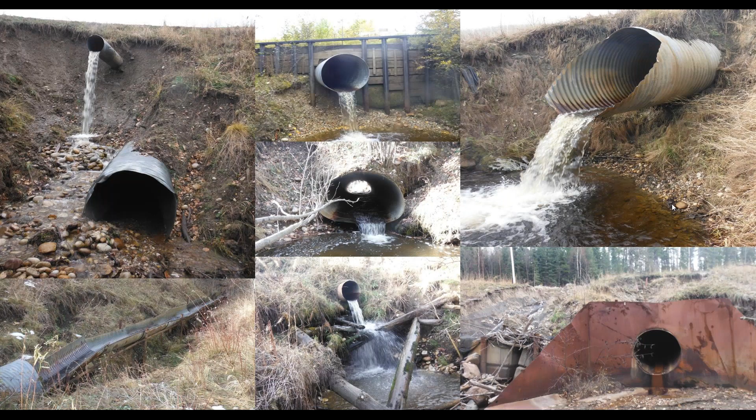There we go. Okay, so one thing I've noticed about the webinar presentations so far is that everyone seems to have their own personal collection of terrible watercourse crossings that they've seen out there in the landscape. So this is no surprise to anyone who is out there on the ground looking at these things. What it tells me, though, is that there's definitely a problem in our province with regards to this particular topic. Here are a few that I've stumbled across over my time, and I'm sure there'll be many more to come. But how do we get to this state? The question is, how do we get there? Why are we there? And why are we still fighting with this?

So let's take a step back a few years and let's think about the origins and the planning stage of road construction. What happens first? Well, to go from point A to point B, a road center line and alignment is characterized, found usually in an office on the desktop or through mapping software to begin with. And then it's followed up with field inspections and surveying.

Watercourse crossings are noted and found. And these watercourse crossings, the watercourses themselves specifically, are in a state of erosion. In fact, they have been eroding since the last glaciation, and they're continuously eroding, some at a higher rate than others, of course, as you can imagine.

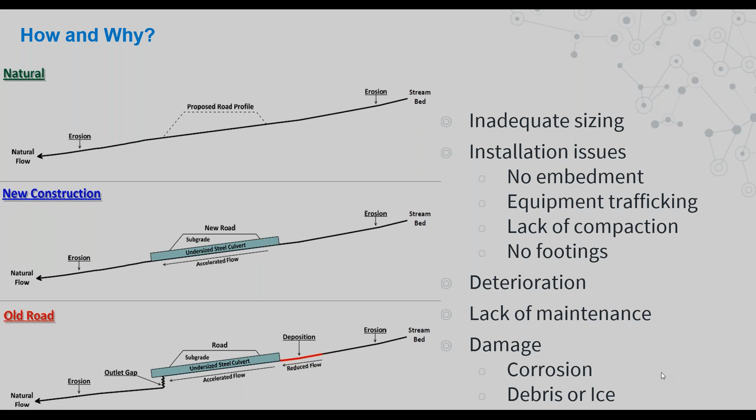So what are our options? What do we normally do to replace these? Well, the simplest option is to replace the culvert with a corrugated steel pipe. Let's hope we don't make the same mistakes that we did the first time when we built the road. However, these projects in themselves can be as simple as a 2 or 3 day job, or they can be several months in duration, depending on each site and site specific.

And again, I'm not going to dwell on the proper installation of a culvert too much here. There have been other webinars that have gone into this in more detail, and they've done a very good job. I'd encourage you to look them up when they're available. But basically, some advice from someone that I've worked with is to ensure that your slope is as close to zero as possible, and make sure you have it properly embedded and, of course, properly sized for the watercourse.

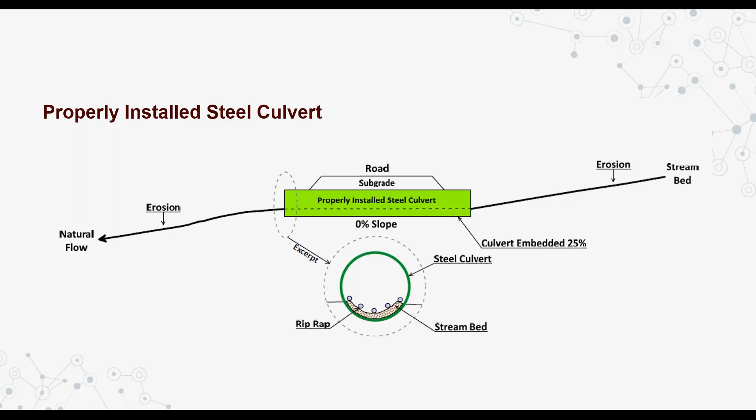What are the other options? Bridges. Definitely install a bridge. Again, there are other concerns with costs and site-specific constraints that may apply, but it is another tool in our toolbox.

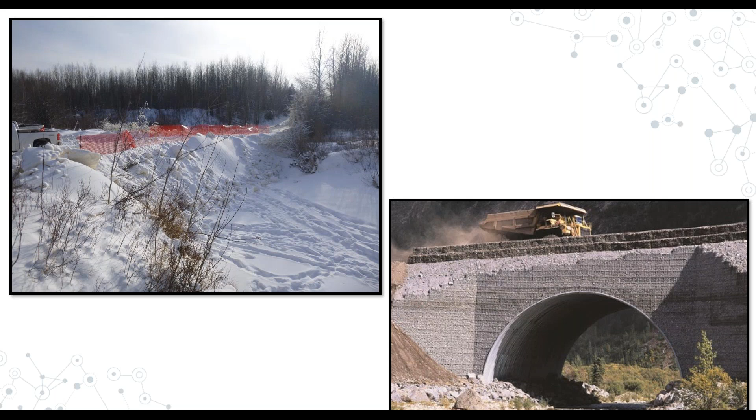We also have temporary structures like log or snow fills or ice fills that may be applied, again, only during temporary access requirements. And we also have multi-plate arches, which here on the right, you can see in a mining setting in Alberta, which can be applied, again, another option in the toolbox, but there might be constraints.

Well, if we take that same arch design and let's reduce it to something a little bit smaller here, maybe with a different material and lower cost and ease of installation, we actually have another tool in our toolbox that we can apply on these resource roads. And here are two pictures of this modular open bottom culvert system we're going to talk about.

The product is Enviro-Span. It's built out of high density thermoplastic material. It's designed to be flexible. They call it an open bottom modular culvert system.

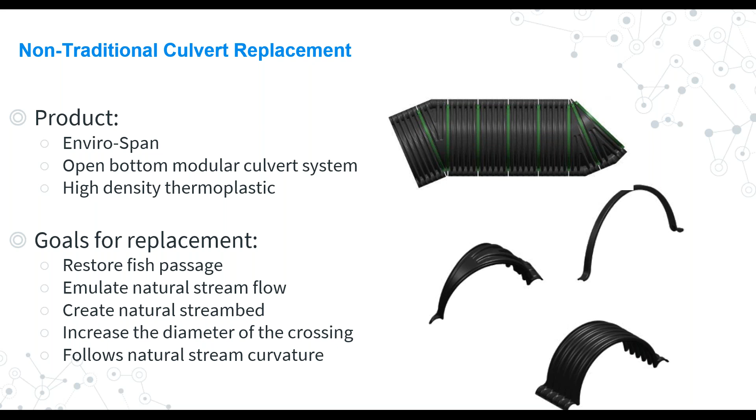A properly installed Enviro-Span arch is able to accommodate the natural horizontal gradient of the watercourse. Basically, you can install this product on any angle of watercourse as long as the subgrade is able to. The Enviro-Span arch will stay there and in place. So basically equivalent to the angle of repose, so to speak.

The bottom or underside of the arch allows you to emulate the natural stream bed if you need to recreate it, if you're removing a corrugated steel pipe, for example. And we'll go through each of these items, including the footings and the placement of this product. But this proper installation will allow the natural rate of erosion for that watercourse crossing and allow the natural passage of fish migration through the structure.

A quick comparison between the two products. I'm only going to compare it to a CSP because of the size of the product. The largest size of this product is about 2,100 mils. So it's most comparable to a culvert of similar size. And for simplicity, that's the most direct application of this tool.

The weight is very lightweight. You can move these sections and place them by hand with two people versus slinging in some large diameter corrugated steel pipe. The cost of installation is actually less than a properly installed CSP, and I attribute that to the reduced requirement for the compaction equipment required for the proper installation of that. The compaction around the Enviro-Span, as you'll soon see, is quite minimal.

It's resistant to corrosion, versus CSP will deteriorate. Leaching is non-existent. The strength is comparable. The integrity is very good. It's resistant to cracking and breaking. The only downfall of this particular product is with regards to UV radiation. If it's exposed to sun, it can deteriorate. But given that it's installed underneath the road, that's a pretty minor problem.

It's resistant to abrasion, and as I mentioned, the slope is basically unlimited. Whereas with a CSP, you know, if you're anything higher than 3.5% gradient, you're getting into some very interesting fish baffles and that sort of thing. So that's no longer required.

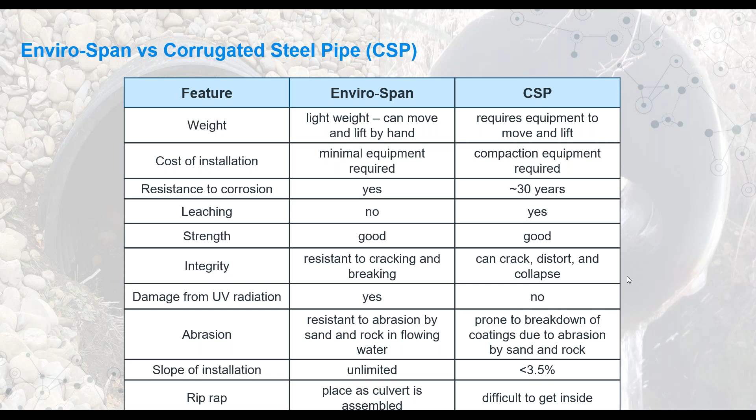So let's hone in on our case study here. Let's go to Walton Creek. This is a project I completed a few years ago. It's located 21 kilometers west of Sundre, Alberta. The watercourse is a tributary to Bearberry Creek. It's a small permanent fluvial water body with an average bankful width of 2.4 meters.

Having said that, for this project, we're not into rebuilding roads. Rather, we're just going to replace the watercourse crossing. But if you did have a project where you were in the planning stages, do keep that in mind with your watercourse crossings.

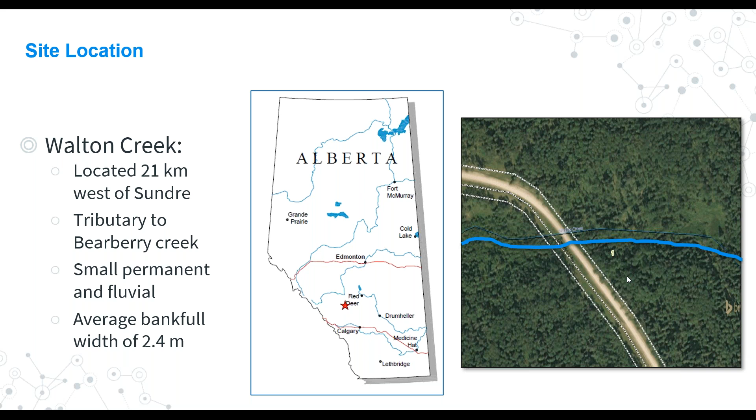Some of the existing culvert characteristics include the inlet end, where some ripping and cutting of the structure was observed, so some exterior damage. There was some minor erosion present, again, likely as a result of that damage to the inlet end. The outlet end, there was a significant amount of road subgrade that had washed away, creating a cliff-like situation, so to speak. The outlet end of the culvert was elevated or perched by better than half a meter. The scour pool was approximately 1.18 meters in depth, so a fairly significant pool.

Overall, the culvert was a 1,000 mil culvert with 17 meters in length. It was partially collapsed, most likely due to poor installation practices and trafficking of equipment over top of that structure. We figure kind of had the banana effect going on. The culvert was not at all embedded. There was no substrate inside, and the horizontal gradient for this culvert was more than 7%, causing increased water velocity.

Here's kind of the sketch of what the existing facility looked like. We have that culvert at a significant angle. We have some fairly steep slopes kind of on the shoulders of our road, in particular on the outlet end, which were eroded. The biggest take-home message from this slide that I always like to point out is on the far left side, you can see that red kind of dotted and hashed line. That's a PLA, so a pipeline.

It's fairly standard under the Public Lands Act to have your dispositions adjacent to each other, and that does in fact make plenty of sense from an ecological and fragmentation perspective. But it does incur some challenges for watercourse crossing replacement projects and restoration. As you can imagine, some of these crossings were trenched in, so before horizontal directional drilling was a common practice, which means that this pipe is likely not that deep.

So if you require the removal of fill over top of a pipeline, in particular if it's active or operating, that's generally frowned upon. So that's something to keep in mind with these projects for sure, is who's beside you, who's your neighbor, and what other obstacles you might have to overcome to complete your work safely.

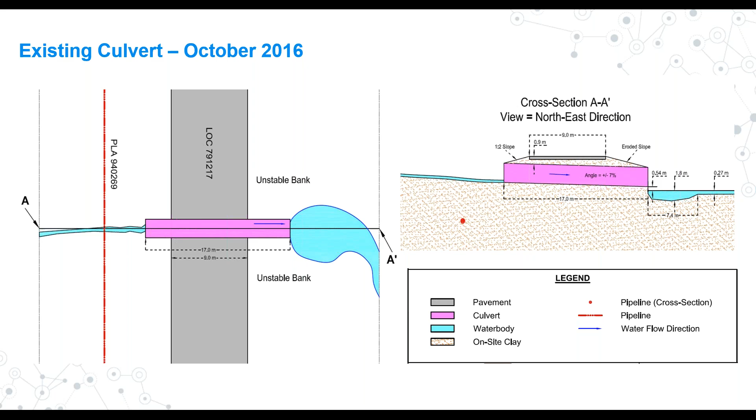This is that inlet end. You can kind of see it's bent up and cut off. It looked like somebody had taken the oxyacetylene torch and chopped off the end. Our guess is it was maybe as a result of trenching activities for that pipeline that was installed on this side. We don't really know that, of course, but that's kind of our only theory with that.

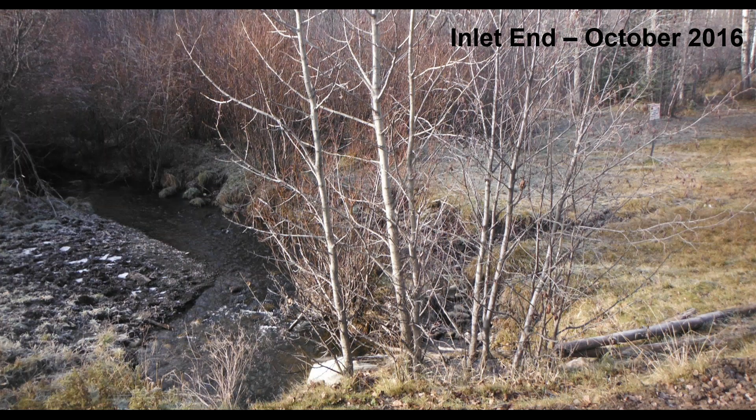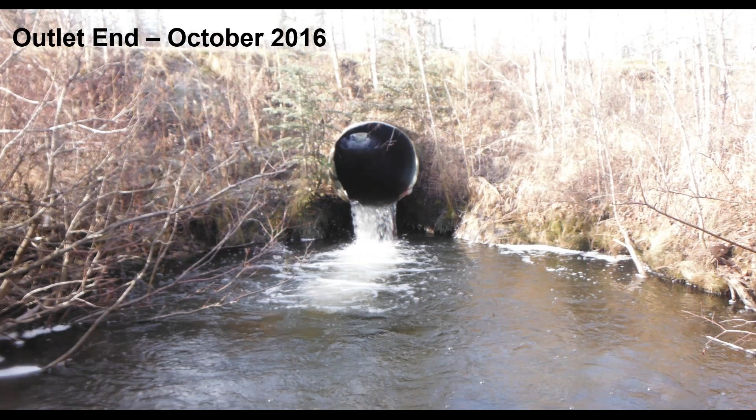Here's a view kind of from the top looking down at the inlet end. You kind of see a bit of a dog leg in that watercourse. The alignment isn't exactly where it should be, but it is what we have to work with. Here's that outlet end showing the hanging culvert by approximately half a meter and that very large scour pool, creating a fabulous place to go for a swim on a hot day.

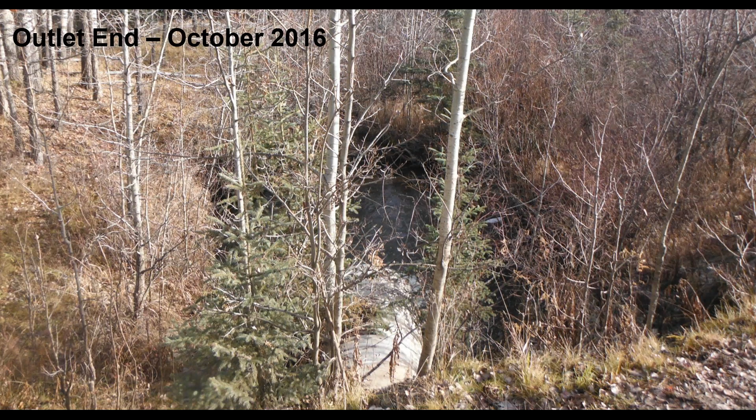Here's the shot from above looking at that outlet end, and what you see in particular on the right, the road subgrade has eroded to a point where it's encroaching onto the road running surface. As you can imagine, that creates a fairly significant safety concern. So it was definitely time for this one to have some work completed on it.

Some of the fish species that were brought up by the AEP Fish and Wildlife Internet Mapping Tool included brook stickleback, lake chub, longnose dace, white sucker, and a stocked inventory of brown trout. The RAP, or the restricted activity period, for this watercourse is September 1st to April 30th. And as you may or may not know, the RAP is the designated times of the year where in-stream work should be avoided to prevent impacts to fish during sensitive life stages, such as migration, spawning, egg incubation, and fry emergence. So avoid the RAP whenever possible.

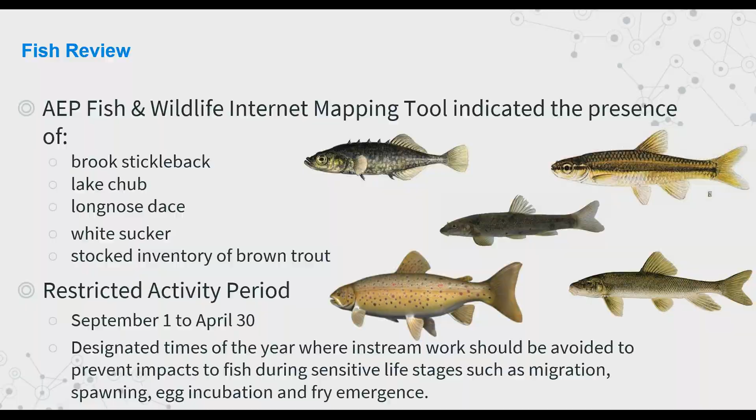The proposed culvert replacement included maintaining the stream flow, facilitating the natural stream alignment, so if any slight corrections could be made with this work, do our best to accommodate that, minimize the amount of in-stream work, and of course, minimize the amount of turbidity, and minimize the road closure of this particular disposition, which is always an interesting one.

The majority of this work was completed on the weekend. All road users were notified, and plenty of signage did go out at the beginning of this road. But one thing I noticed was that when you close the road on the weekend on the east slopes, the larger the fifth wheel, the larger the negative vocabulary.

Having said that, we did complete the project and were able to let the campers through as quickly as possible. We also wanted to increase the diameter of the replacement culvert to accommodate the flow as indicated by some of our modeling associated with this watercourse. We wanted to remove that steel CSP and not leave it in the road bed. We wanted to complete our work outside of the RAP.

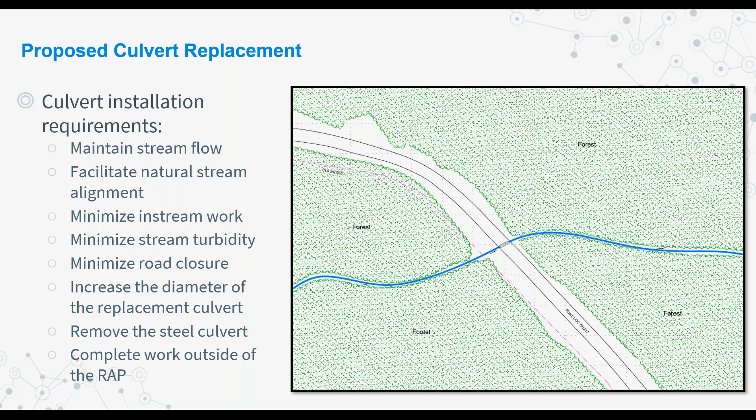Here's a sketch of our proposed culvert replacement utilizing our Enviro-Span modular culvert. Again, we're set back from that pipeline and we're not removing any material from it at this point in time. And the road alignment on that slightly longer Enviro-Span crossing is shown here. We'll also improve the erosion on the outlet end by changing the slope of that, by extending it just a little bit more and revegetating it as required.

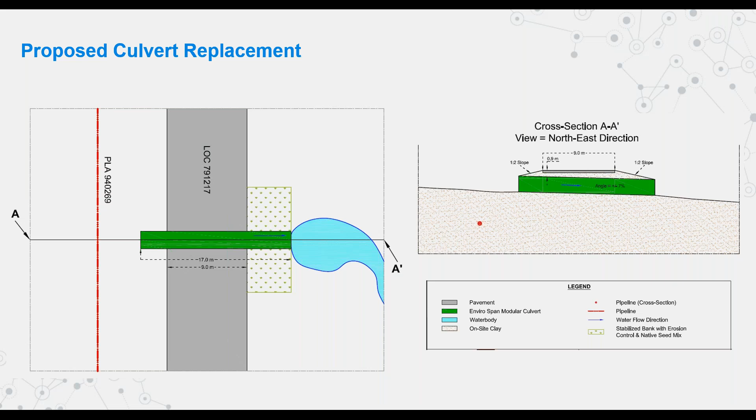The first step is to remove and excavate the soil for this road. For this project, we reallocated approximately 1,200 cubes of mineral and aggregate, and this was stockpiled on both sides of the watercourse crossing. For water management, our work area was to be isolated from the watercourse with steel plate dams.

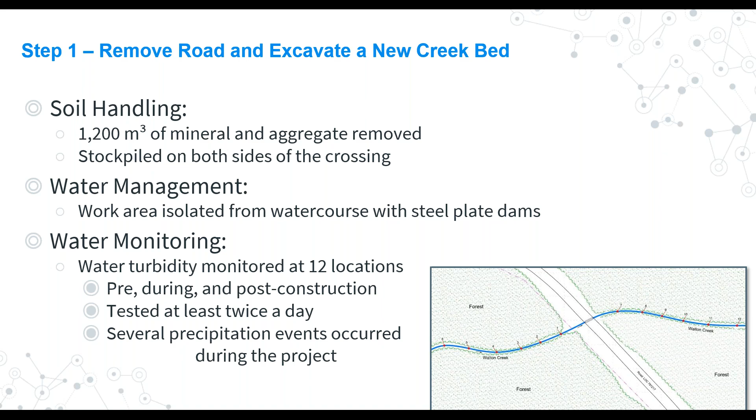Turbidity monitoring was completed at 12 locations, and this was done before, during, and after construction. This was tested at least twice a day, and several precipitation events occurred for the length of this project. Again, highlighting the importance of your background monitoring stations, just so you have equivalent turbidity readings to compare to. Here we are excavating the road subgrade material, piling it on the one side. That's the 1,200 cubes I referred to earlier.

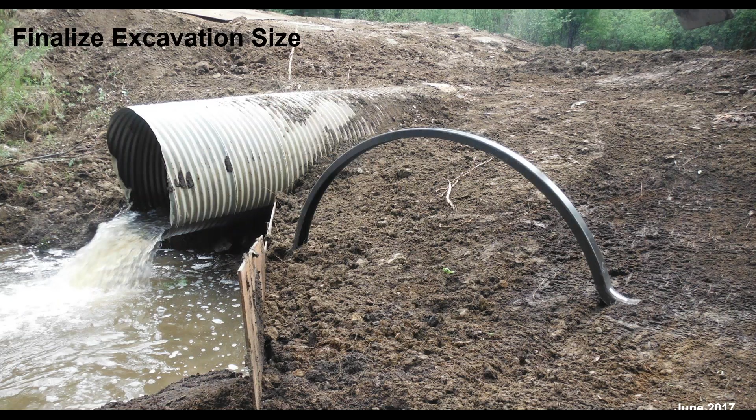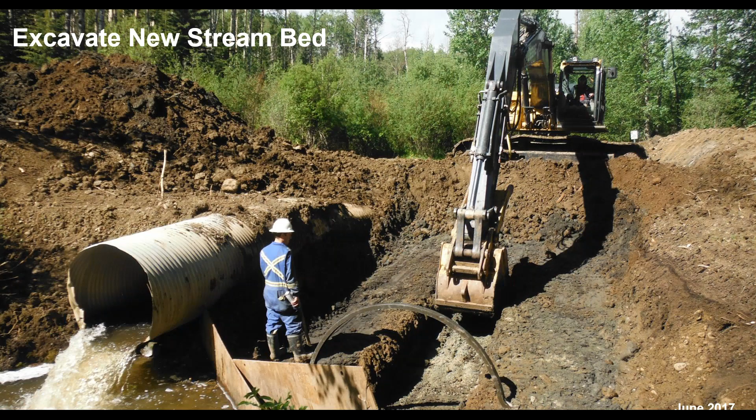Next, we're installing the steel plate cofferdams. This is on the inlet end. This is in preparation to put our workspace into isolation from the watercourse. Here we are sizing up the alignment of our new crossing in relation to the old one, and getting a feeling for where the soon to be constructed stream bed will set up. And here we are excavating more material to create that stream bed. We decided to use the digging bucket here for this size of arch, just because the cleanup bucket was too large.

And step number 2 is the footings. The best footings for this structure, as recommended by the manufacturer, are flexible and allow for movement. As I previously mentioned, this plastic is designed to bend and to be flexible. It's designed for this type of environment where you have a lot of freeze and thaw cycles and frost heaving, as you would adjacent to a watercourse. This is really what this product's meant for. So when it comes to footings, flexible is really the recommendation.

It could be something as simple as locally sourced logs from the adjacent timber stand. In our example, we use pressure treated poles. There are other options out there, including concrete grade beams, precast half cylinder grade beams, or concrete filled steel pipe. Those have all been used, but as I mentioned, the manufacturer really prefers something more flexible to allow the structure to move underneath.

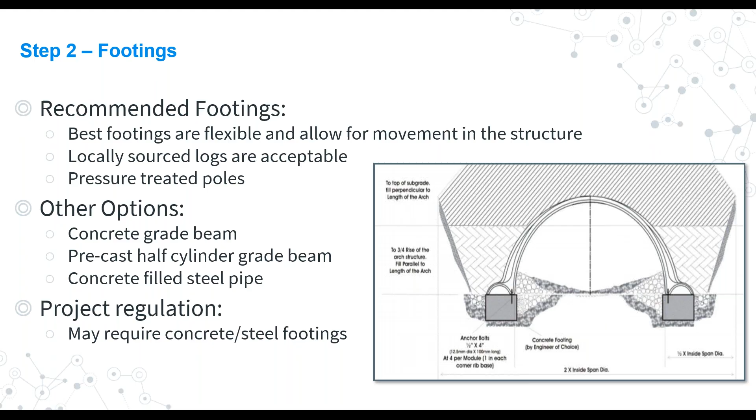So here we are laying out the footings. We have pressure treated poles on the bottom, and we're continuing to excavate our stream bed. I won't go into depth on stream bed creation and emulation in this talk, simply because there's another talk about emulating stream beds coming up. So I'll leave that good material for that talk. But that's essentially what you're doing here, recreating that stream bed.

Often when we're doing these, we find the original stream bed adjacent to this watercourse crossing, and we can tell that based on the sediments and the organics and the aggregate profile of the soil as we excavate. So in most situations we're able to place this right on or very near to the original stream bed for the watercourse crossing.

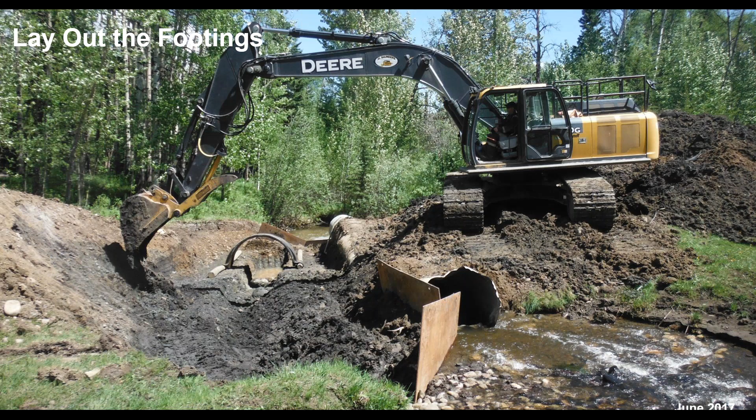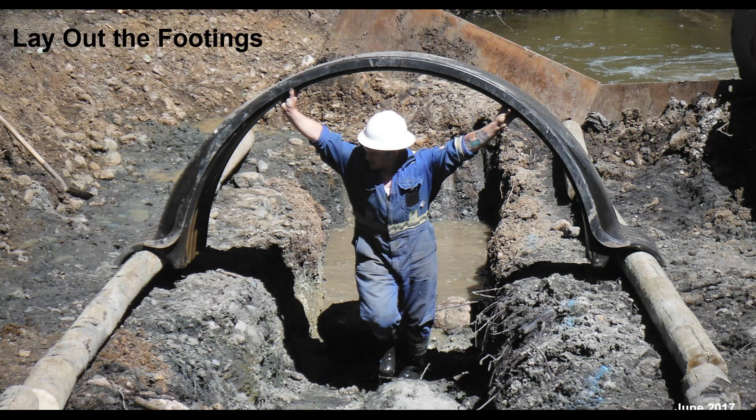Here we are continuing the excavation, laying out our newly created banks for the footings, and we'll work up towards the inlet end of this particular structure. Here we are sizing the placement of the footings in our newly created stream bed. Like I say, these pieces are very maneuverable, and you can slide them up and down the footings without too much difficulty. Here we are with our footings laid out.

Now, the modular culvert assembly: these structures are modulars that are 2,150 mils across. So the opening is 2,100 mils, and the width of these is better than 1,000 mils. The weight of each of these is approximately 64 kilograms, and our designed length was 18.2 meters. Therefore, we required 17 modules placed to get our watercourse crossing length.

The placement of these is fairly straightforward. You can sling them into the excavation using an excavator or another type of machinery, and then you can move them by hand. It's fairly straightforward, as you saw in a previous slide. And then there's slide connections that sit on top of the flanges to hold the modules together. Basically cover the entire structure with a geotextile and install the riprap where required.

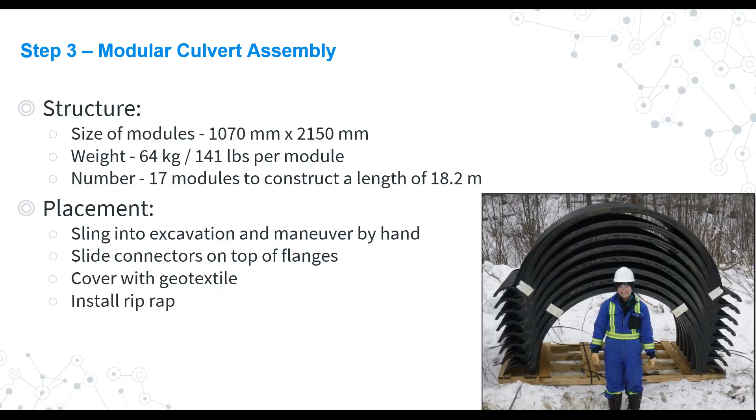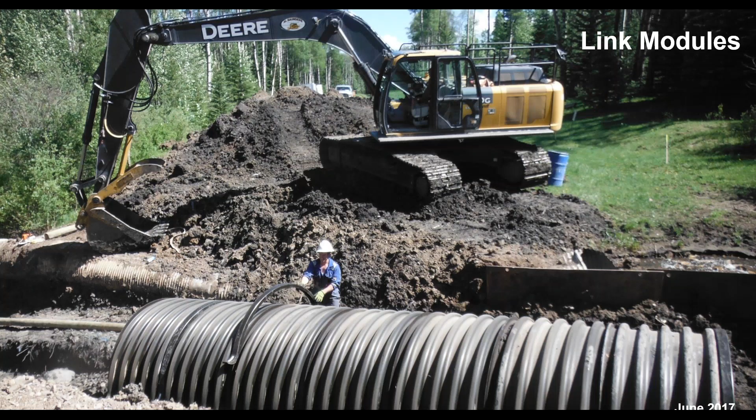Here we are placing the modules on top of the footings. We slung in a package and basically pop them apart, start laying them down. Here's a slinging in package of the modules. And here are the collars or the link modules that connect the different modules together. And they just sit on top. There's no hardware or nuts and bolts to strap together. They simply just sit on top, and the mass and the weight of your subgrade is really what holds everything together.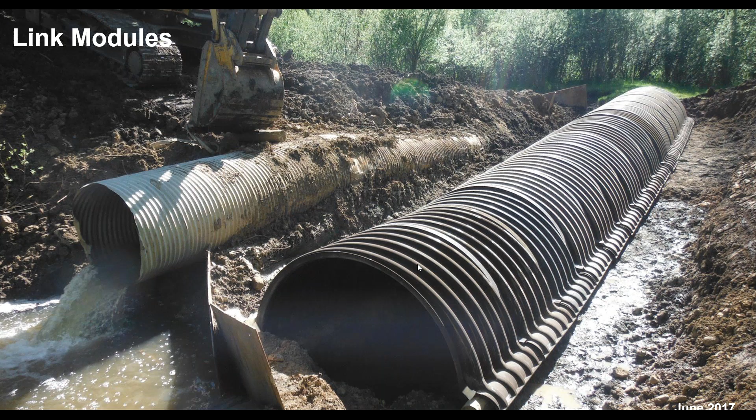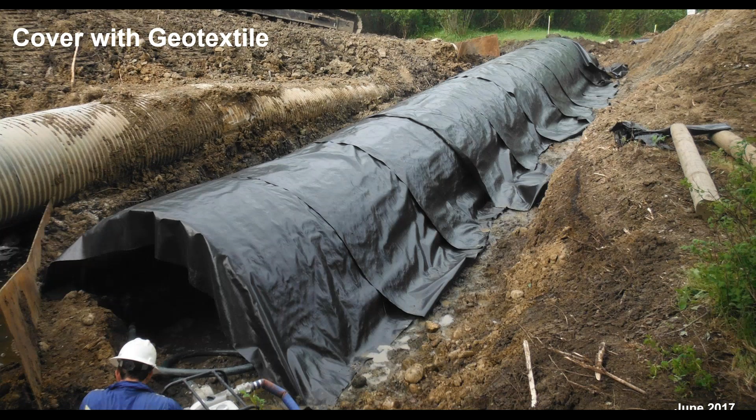Again, some more linking with the full structure totally linked together here. Our 18.2 meters, everything is ready to go. Here's another shot of it in relation to the road subgrade and subgrade material on this particular watercourse crossing. Here we are covering the structure with geotextile. There's no recommendation whether you use a woven or non-woven geotextile. They just recommend covering it.

Step 4 is the backfilling and the purge. Backfill is recommended with simply hoe tamping the soil. For this example, we did utilize the portable hand tamper. However, it wasn't really required, as we found later on. And as the manufacturer stated, there's no requirement to reach proctor density with your subgrade or even 90% proctor. It's just not a requirement. Too much compaction with this structure could result in collapse of the structure from the outside inward. So that's why they recommend simply just a hoe tamp.

We backfill this structure in 15 centimeter lifts on either side, being fairly diligent to fill up either side sequentially. If you place too much soil on one side than the other, you actually end up moving or pushing the structure out of alignment, which would be less than ideal. You want to make sure you have greater than 1 meter fill over top of this structure before you reach your road running surface.

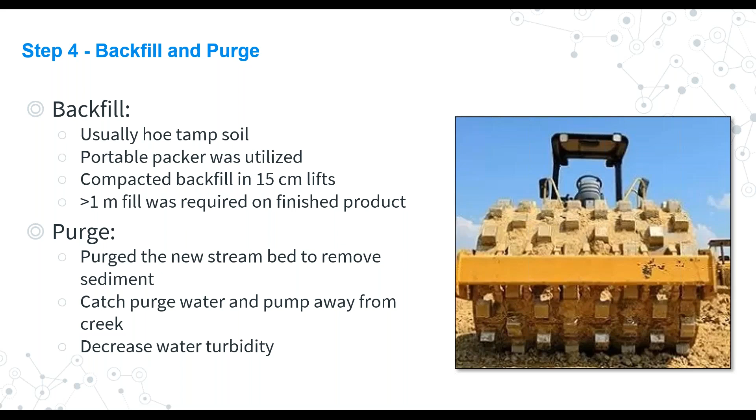Purge, this is referring to the watercourse. So now that we've created a new stream bed, we want to make sure that we don't have any sediments or any source points for sediment release into our watercourse. So we actually purge our stream bed and remove the water appropriately away from the creek, just to decrease your water turbidity even further so you don't have any exceedances.

Here we are with the backfilling. You want to use a material that is suitable to backfill. So what that means is basically nothing that's sticky, wet, and sloppy. You want to use ideally a good structural material that is nearby. If you are excavating one of these and you end up into some of that liquid soil, you definitely don't want to be backfilling with that, because there's no structural integrity there whatsoever. So you want to find the good stuff and place that adjacent to the structure and backfill sequentially either side in approximately 15 centimeter lifts back and forth.

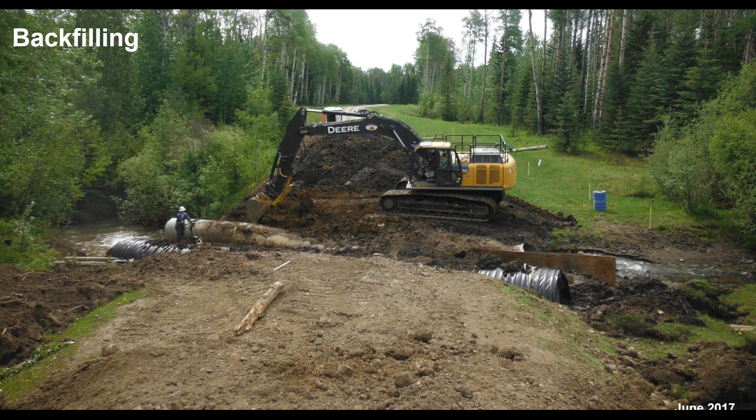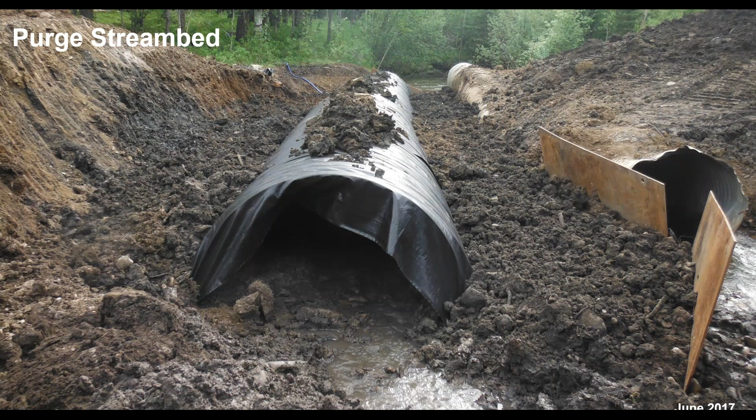Here we are commencing the purging of the newly created stream bed. Again, removal of any fine sediments that might be in there and removing those away from the watercourse, so that we don't have any unwanted increases in turbidity. So removing that dirty water and disposing it into the forest while maintaining our watercourse flow.

Here is the inlet end of the culvert. Once we were satisfied with our turbidity readings from the newly created stream bed, we were able to flip our watercourse over to the new structure, thereby discontinuing the old structure. As you can see here, our watercourse is now entirely flipped over to the modular open bottom culvert.

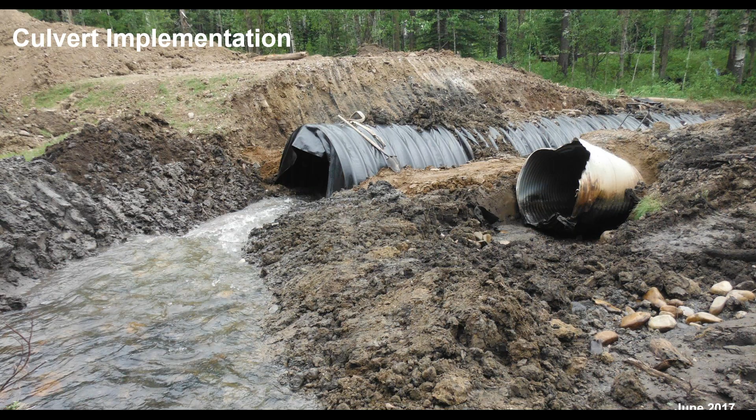Step 5 is the removal of the structure. Now, when removing these things, safety is definitely paramount. If possible, separate these sections in smaller pieces for easier removal. Even though it may look like there's no debris or sediment inside, there's always a likely chance that they are stuck in the riffles and whatnot. So when you remove these structures, you want to make sure that you're not picking it up and dumping that junk into the creek. You want to be pulling it out in sections and pulling it back towards you.

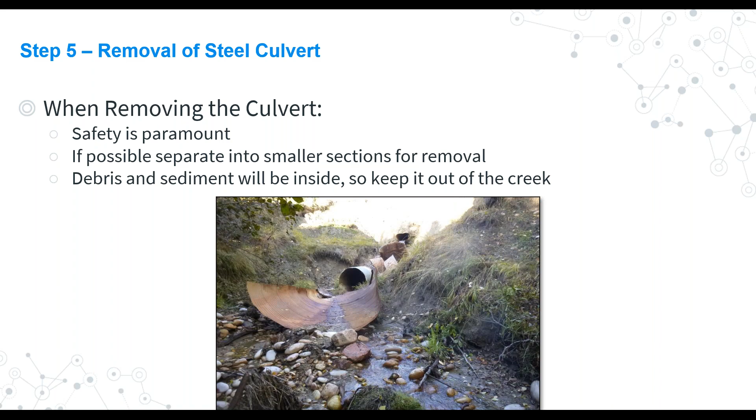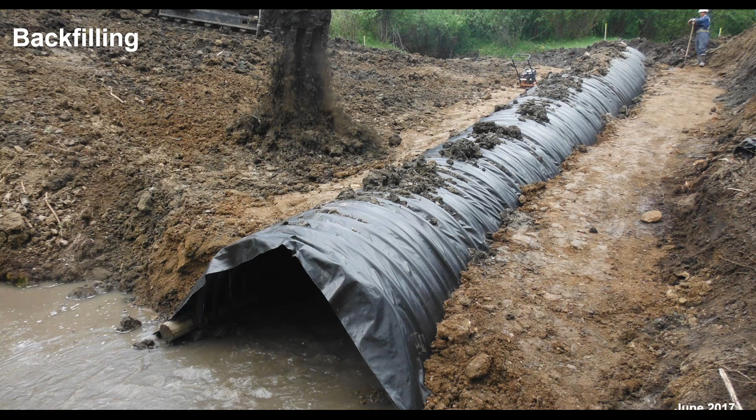Here we are doing that. We've separated the original structure and are pulling it out sequentially away from our watercourse and crushing the material for disposal and recycling. Our backfilling activities continue, reaching further to the surface of the structure in sequential increments. More backfilling, as you can imagine, takes a while to backfill 1,200 cubes appropriately.

Step 6 is the reclamation. Some of these details include maintaining that 2-to-1 slope on the road structures to accommodate revegetation, and placement of topsoil. If you have any, you want to make sure that you distribute it properly and to your best advantage. Seed the disturbed soils with a native seed mixture. Aprons on both ends were completed with Class 1M riprap, and complete your final water monitoring activities throughout the project.

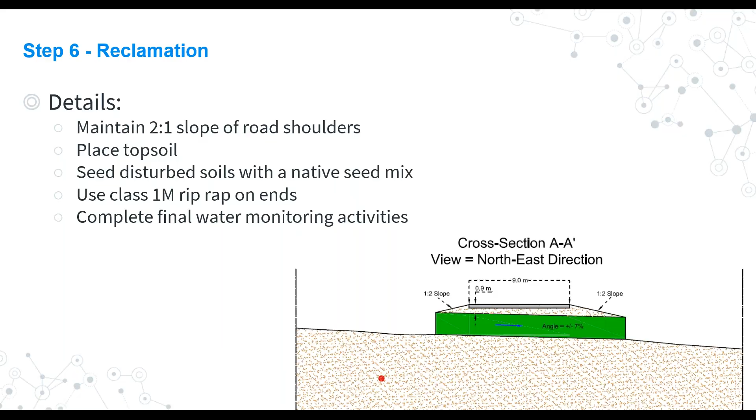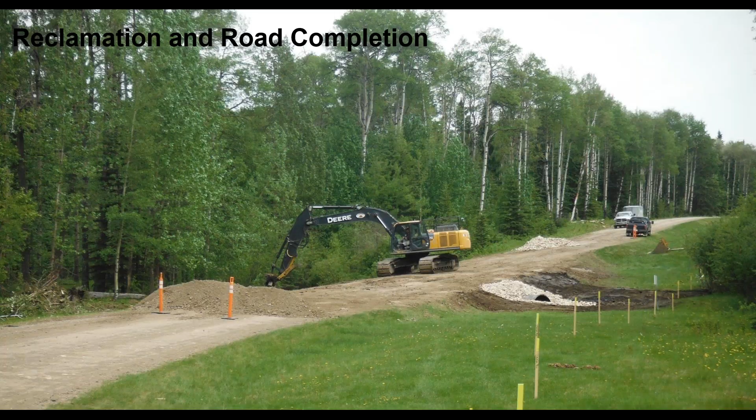Here we are kind of putting that soil back together, finishing our 2-to-1 grades, installing our Class 1M riprap apron on the outlet end. Here's our apron on the inlet end, running right up to that road surface. And the final cleanup activities, you can see here some of the aggregate material that we salvaged from the original operation is still readily available to bring across, and we always try to bring in a load or two of new aggregate to finish the job off.

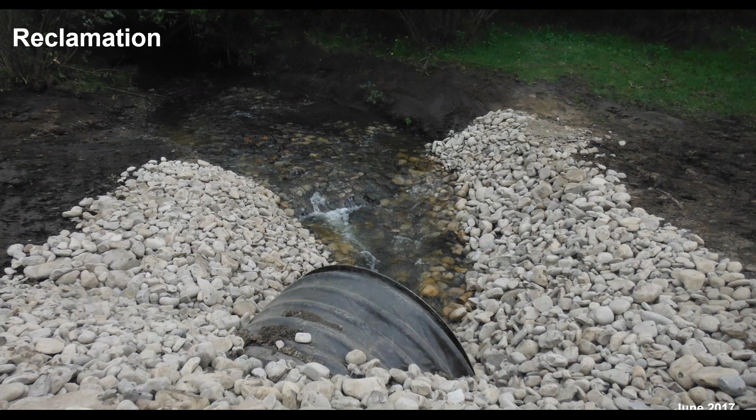Here's our inlet end looking down. So if you remember the previous photos, the inlet end had a bit of a dog leg. We kind of tapered that out a little bit here with this new installation, just simply by realigning the new facility and the new structure. Here's a shot of the inlet.

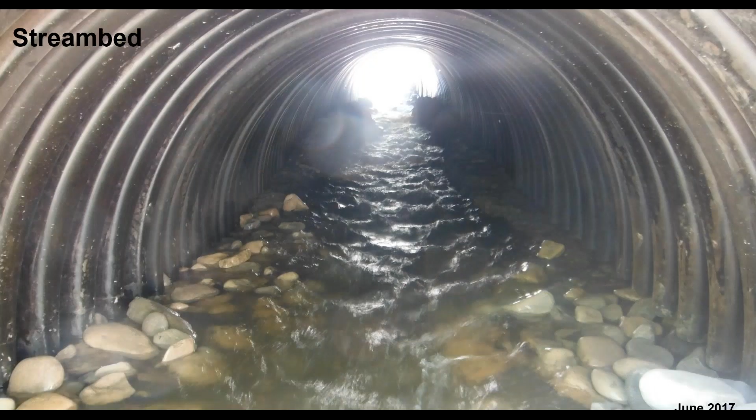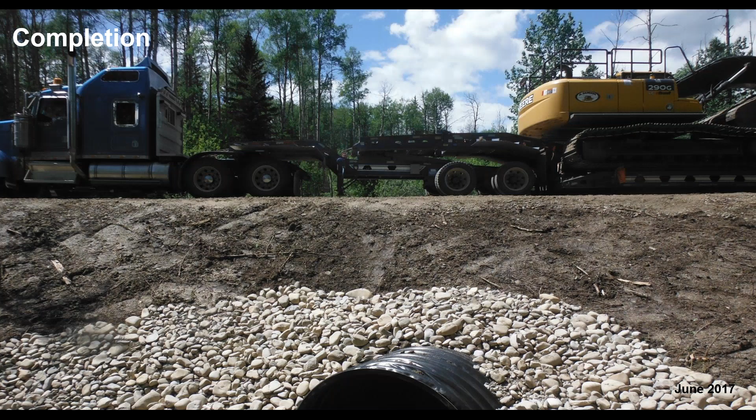This is the outlet end looking up. This is the stream bed kind of finished with the water flowing together. You can see our riprap on either side of our new stream bed and banks. And here's a shot of the end, moving out the equipment at the end of the day after everything is seeded. Follow-up visits, field inspections are recommended annually.

Traditionally, we use the GOA inspection forms. Now we have an app that's available, a GOA app. We'll probably be looking into its use to see if it's appropriate to accommodate these newly restored crossings this year. But traditionally, we do use the GOA form.

Other crossing details include maintaining the road running surface condition, monitoring the abutment condition, monitoring the vegetation recovery, and keeping an eye on your bank full width, both up and downstream at every inspection, just to see if there's much change there. Monitor the riffle crest near the outlet end, just to see if there's any movement there, as well as, in this particular case and many others, monitoring the condition of that pipeline crossing.

If we see any erosion that perhaps is being accelerated for whatever reason, we want to make sure that we're reporting that appropriately. Natural rates of erosion can be expected, but if there's anything that is less than ideal over a pipeline crossing, definitely want to pass that information on.

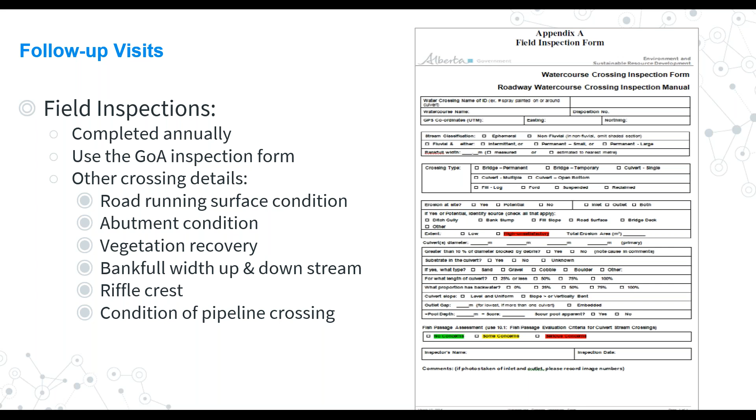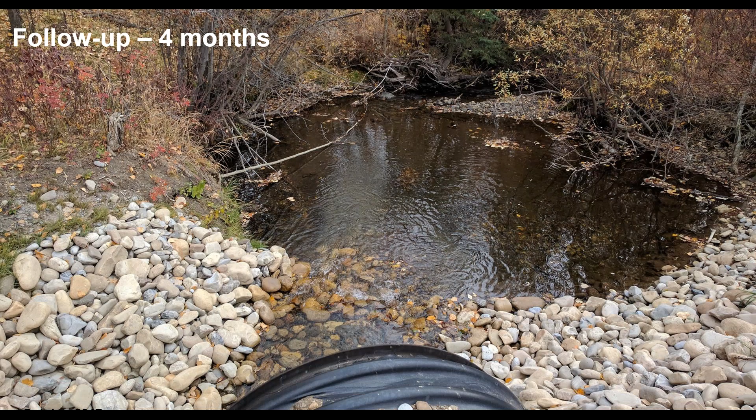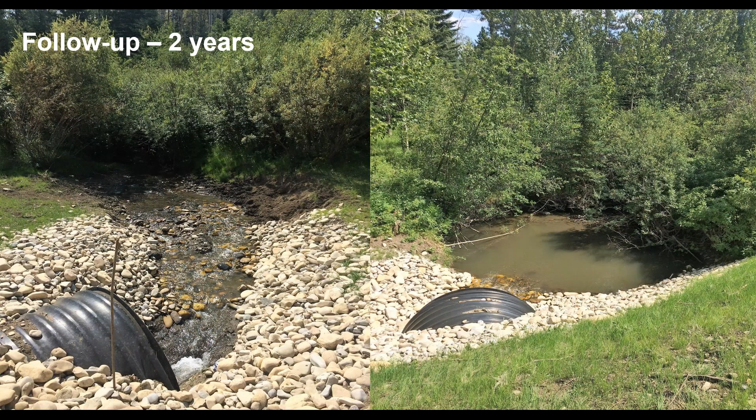Here's the inlet end. You can see we do have some natural rate of erosion as that watercourse continues to correct itself over time, as it has been interrupted by a failed crossing for a number of years. 2 years after, not much movement at all. The watercourse is still flowing, and we still maintain that fish passage to its advantage.

All right, we're going to wrap it up here. I'm sure you're all eager to ask me plenty of great questions.

The modular culvert system is suitable for watercourses with steep grades and replacement of hanging culverts on resource roads. It can be used for both permanent and temporary installations. It can be utilized on both fish and non-fish bearing watercourses. It is a great option where deep excavation is not suitable, for example, if there's a pipeline and pipeline right-of-way adjacent to your disposition. It can also be installed on saturated and organic soils. There's a few different tricks when it comes to the installation of this product in those situations, but we can save that for a different presentation.

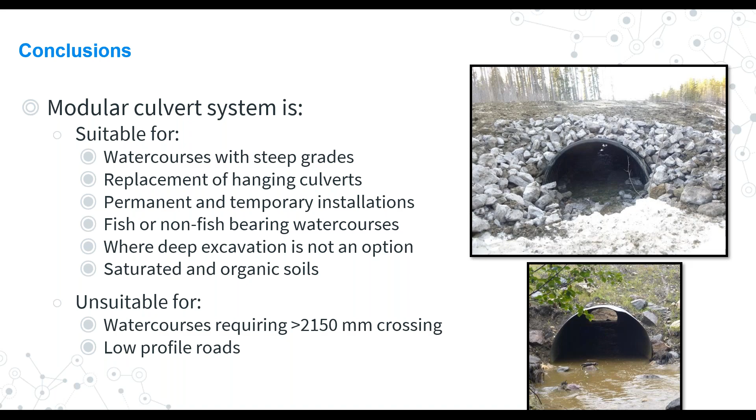And it is unsuitable in a couple cases where I would not recommend using this particular structure. Those would be watercourse crossings requiring an opening greater than 2150 millimeters, or low profile roads, because you do need to maintain 3 feet or better of cover above the structure to maintain structural integrity of the system. All right, any questions?